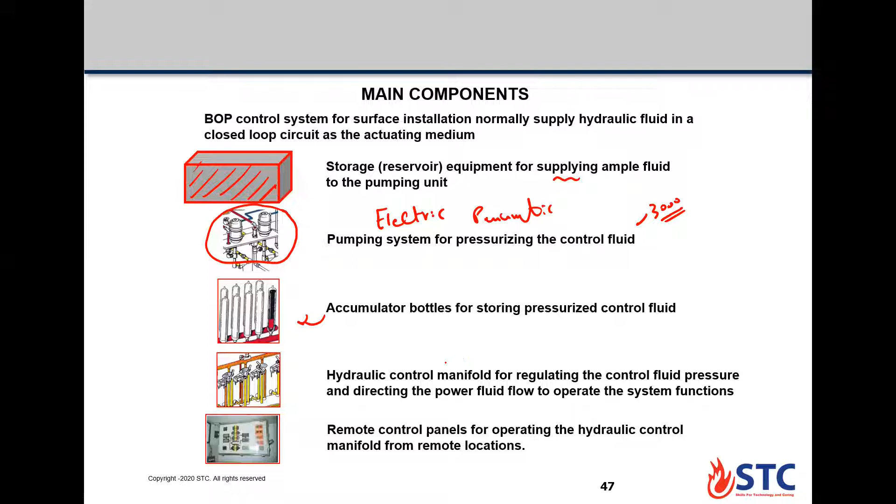Now you have a hydraulic control manifold regulator and the annular regulator to adjust the 3000 psi into the required pressure. If it is manifold, adjust it to 1500. If it is annular, adjust it from 600 to 1500 psi.

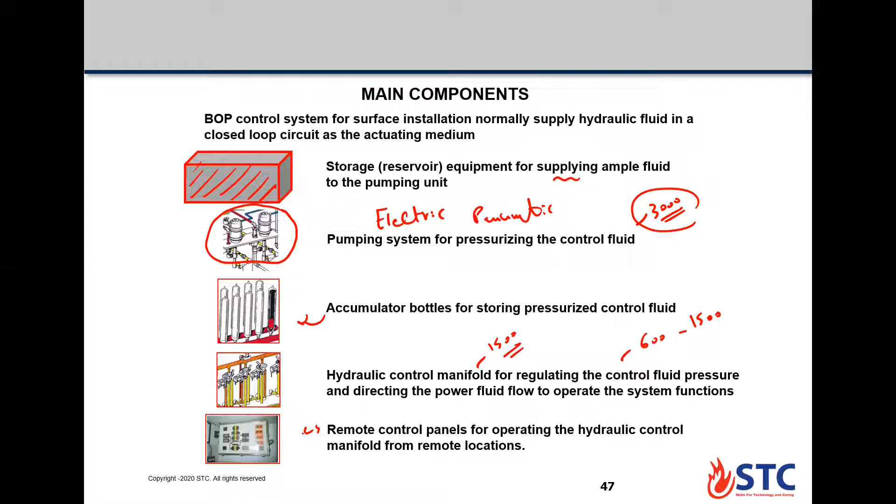Now we have here the remote control panel. The remote control panel is a panel that allows you to make the function from a remote location, not from the unit. Here is a simple schematic for the BOP control unit.

First thing, starting here, we have the air compressor. Now the air starts to come to this point until passing to the air lubricator. The air lubricator, as if the air is dry, can cause some erosion to the equipment. So this is the air lubricator.

Once the air comes to the pneumatic pump, it starts running it. Here for the electric pump, this one is electric and this one is pneumatic. So the electric pump has an electric power supply, an auto electric starter to run it. And here for the pneumatic, it runs with the air pressure.

Here is the reservoir tank. So both pumps start to take fluid from the reservoir tank through suction lines and start to raise its pressure to 3000, then store it here in the bottle.

The electric pump is designed to run if the pressure of the fluid gets below 90% of the full accumulator pressure. This means when the pressure reaches 2700 psi, the electric pump starts to run to raise the pressure to 3000 again.

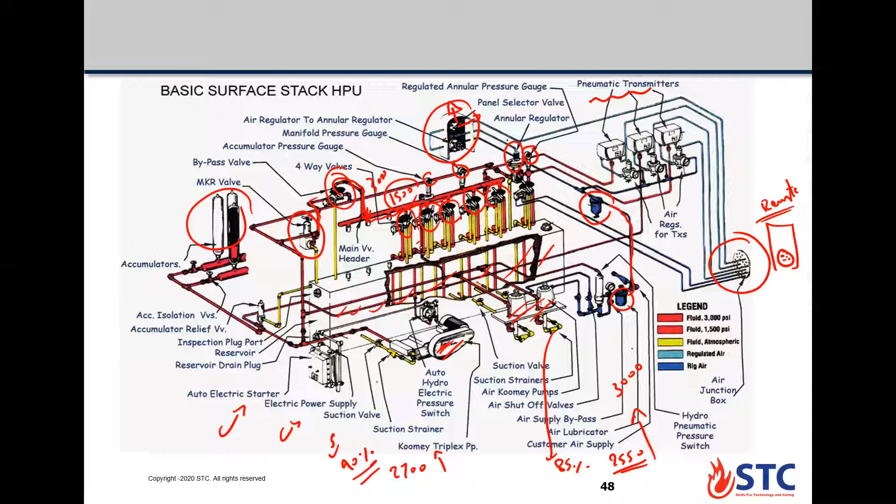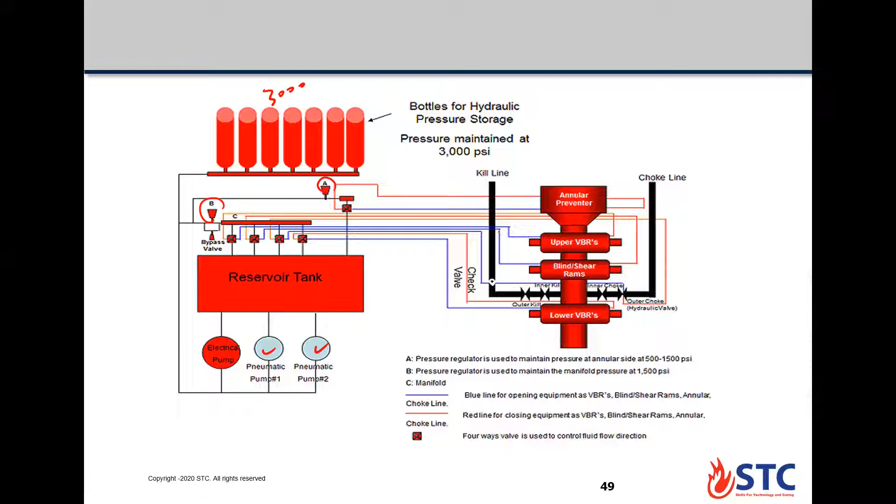Now let's go ahead. Here is the reservoir tank, pneumatic 1, pneumatic 2, electric pump. They take fluid from the reservoir tank, start to raise its pressure to 3000 psi. Now we have the annular regulator and manifold regulator taking the pressure to open and close lines to the annular and the set of rams. Here is the BOP control unit with the gauges: accumulator gauge, manifold gauge, and annular gauge.

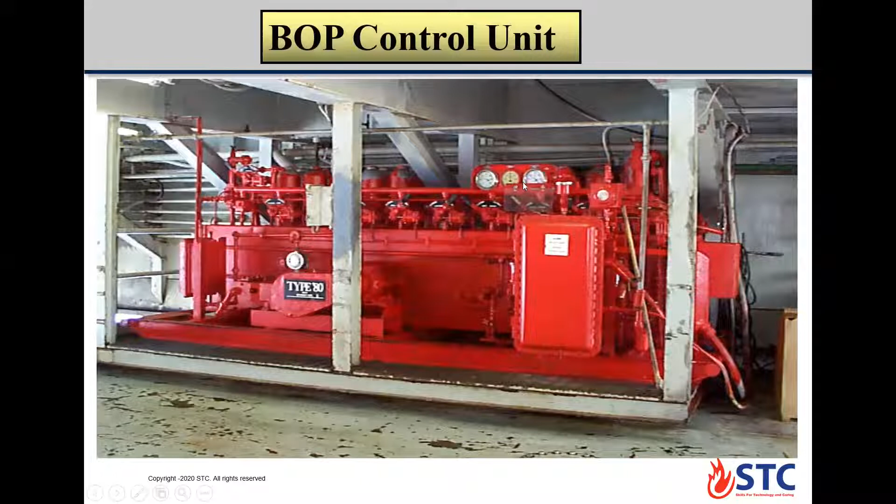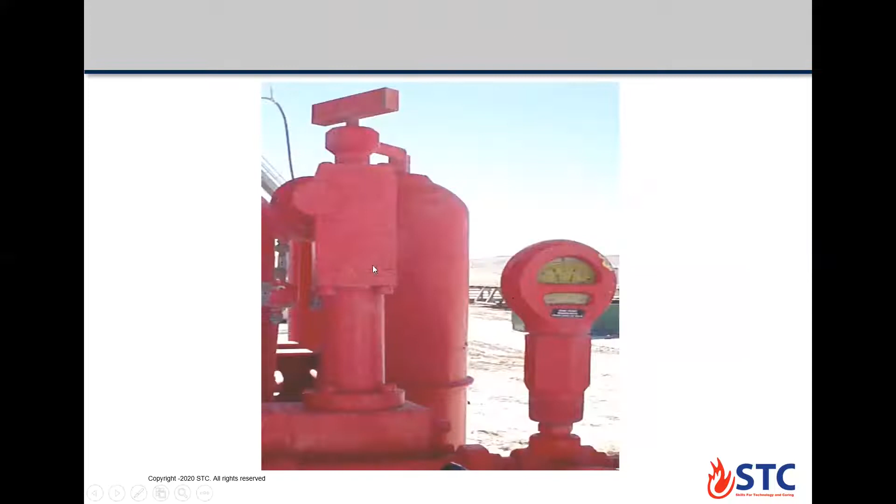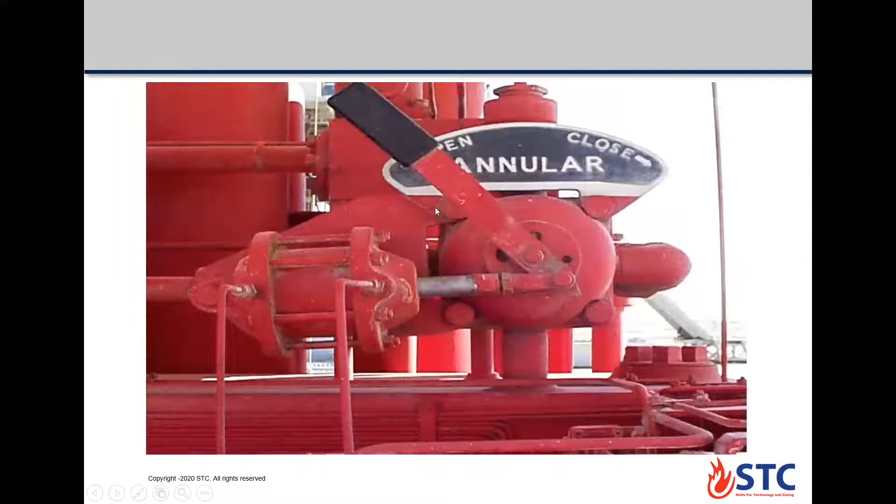Here are the bottles, and here are the hydraulic lines, close and open lines, for the BOP stack. Here is the manifold regulator to adjust the pressure. Here is the 3-position 4-way valve: open, close, and neutral position. Here is the 3-position 4-way valve for the annular: open, close, and neutral. And these two lines are for open and close.

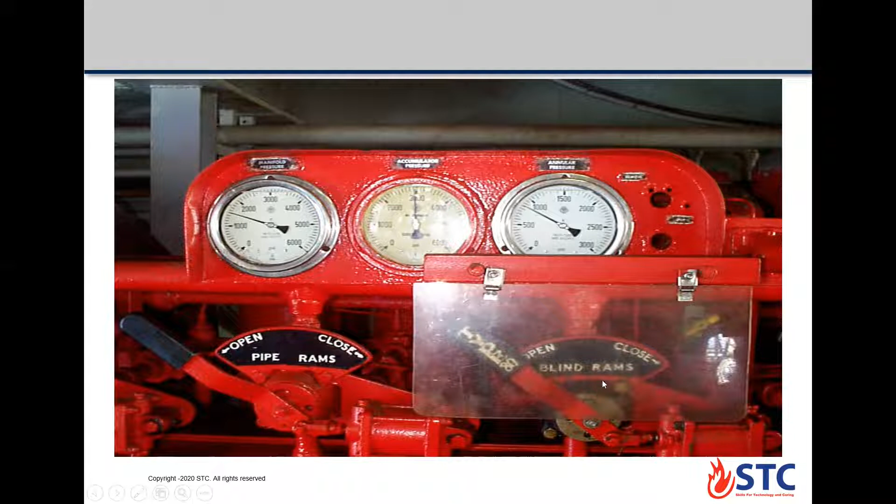Here are the gauges. This one is the accumulator. Here is the manifold, and this one is the annular. If you look here to the blind ram, you're going to find that covered, so not anyone can open or close it by mistake.

Here is the electric pump, the pneumatic pump, and here to reach the accumulator calculation. Once the bottles come to the surface, they will have a pre-charge pressure of 1000 psi. It will be pre-charged with nitrogen, because nitrogen is an inert gas. Then, once running the two pumps, you reach the full accumulator pressure of 3000 psi.

Once reaching 3000 psi, we have to conduct a test called the drawdown test. The drawdown test is to close the annular, close a minimum of 4 rams, then open the HCR. Once you do all of these functions, the remaining pressure should be 1200 psi or larger. This is called the minimum operating pressure.

Minimum operating pressure: if the pressure after making the drawdown test is below 1200, we need to wait 15 minutes. If it's back again to 1200, it's okay. If not, wait another 15 minutes. If still not, this is not an accepted test, and we need to check for the problem.

Here is the remote. Sorry, for the drawdown test? Yes, drawdown test, I know, yes.

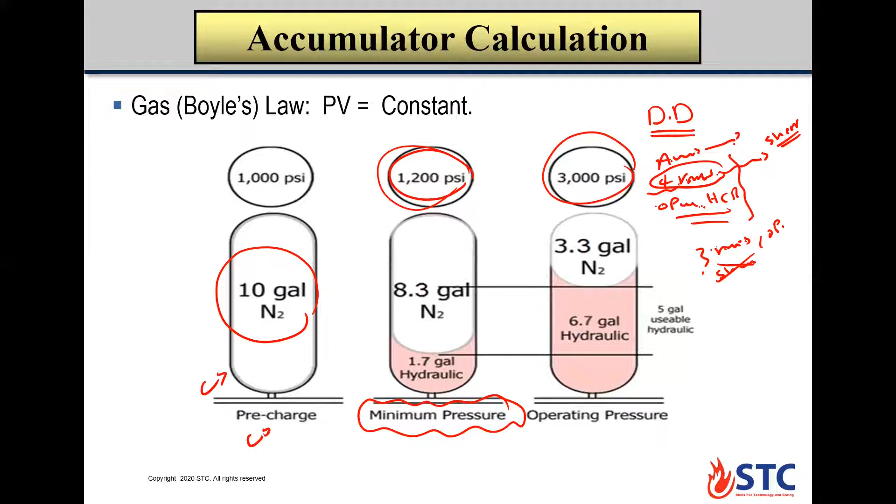So now you close annular, close minimum 4 rams, and open HCR. Then the remaining pressure should be 1200 psi. If not, you need to wait 15 by 15 minutes. Is the pressure back again? Then it's okay, accepted test. If not back again to this value, you need to check the pressure, and it is not an accepted test.

Now here for the remote control panel. The remote control panel is just a descriptive figure for the BOP. You have the master valve, push valve, and open and close for all rams and HCR. Also, you have a digital counter for accumulator pressure, manifold pressure, annular pressure, and rig air pressure.

To use this remote control panel, it's called a two-handed operation. You need first to push the master valve, then open or close the function you want. Once you push the master valve, you activate the air and the whole panel, so you can do the function once you push the master valve.

Let's mention, for example, if we need to close the annular, we have open and close. Let's say annular pressure is regulated at 1000, and here we have the accumulator pressure at 3000. So once we need to close the annular, push the master valve, then press close.

Once you press close, the light should change from green into red. Once the color is changed, this gives you indication that the 3-position 4-way valve is working properly.

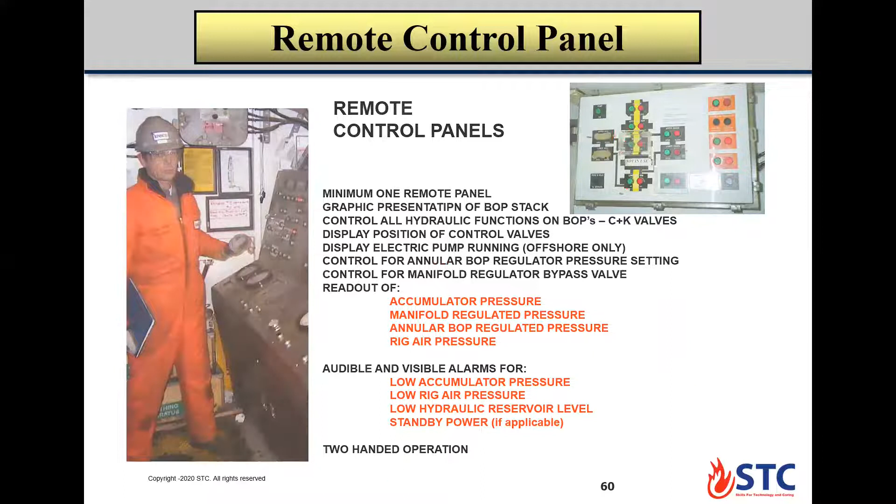Here is the remote panel to the BOP. Rig air, once pressing master valve, activates air pressure in the remote panel, so you can send signals to the BOP.

When the BOP ram is in closed position, the closed line has 1500 psi. If it is in open position, the open line has 1500 psi.

When the 4-way valve shifts, the micro switch activates the light to illuminate. Once the light illuminates, this gives you indication that the 3-position 4-way valve is working properly.

But if you find the color didn't change and the pressure dropped then built back up again, this is a problem with the light bulb itself. When the light illuminates, it tells us the oil, or hydraulic fluid, is on its way to the BOP function, but that's not confirmation. The confirmation is when you look at the pressure and find it drops, then builds up again.

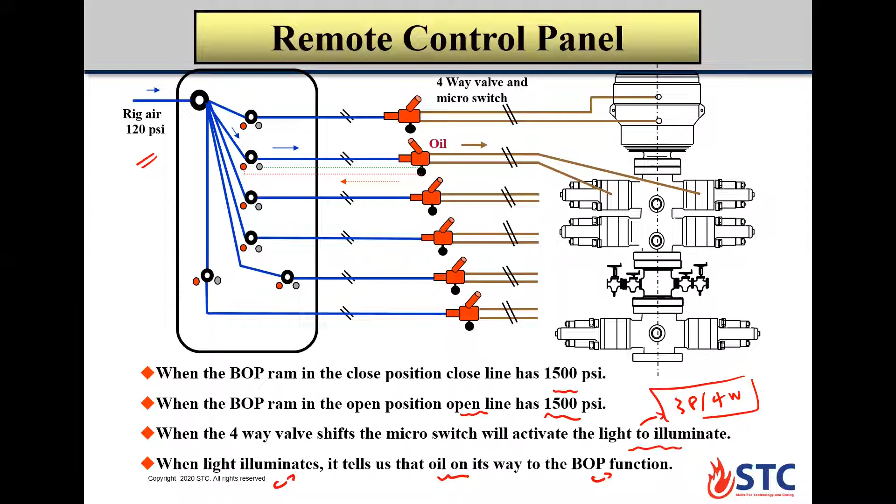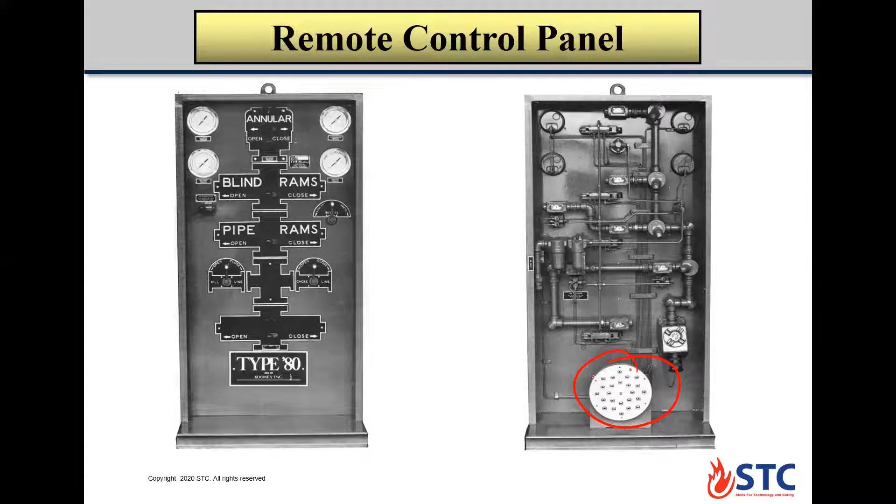Here is the junction box connected to the junction box of the unit, through an airline transmitter transducer, so you can make the function from a remote area.

Here is the 3-position 4-way valve: open, close, and block position. Once you are in open position, all pressure in the system will go to the opening chamber, and the volume in the close side will go back again to the drain.

But if you move it to the closed line, all pressure in the system will go here in the green line so you can close, and the volume in the red one will go back again to the drain. So three positions: open, block, and close. Four way we have: drain, pressure, open, and close.

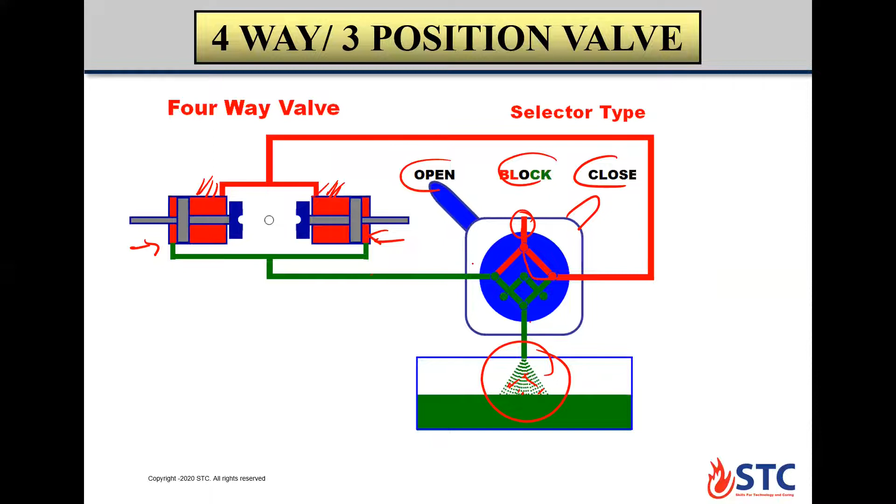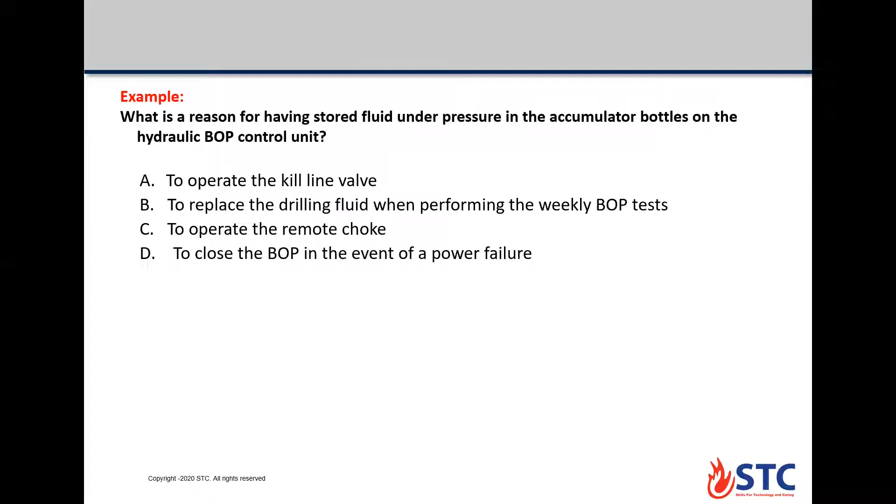Could you check this one, please guys? Option D. Yes, D. Okay, good.

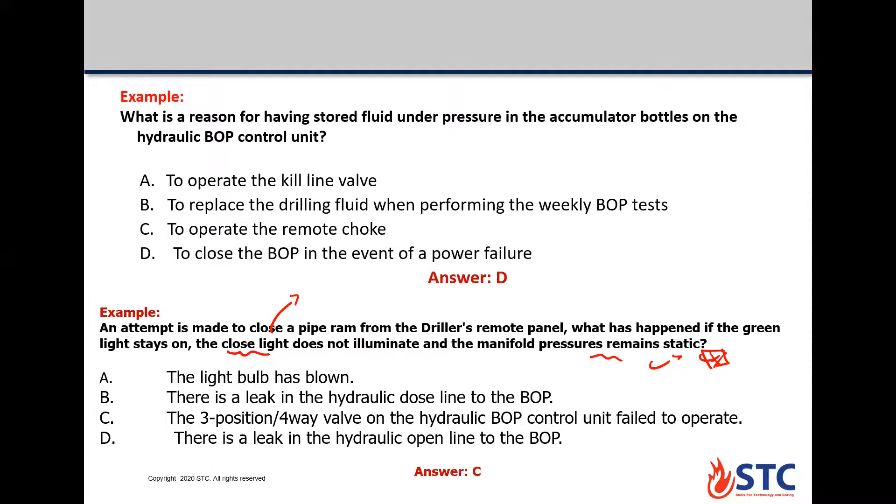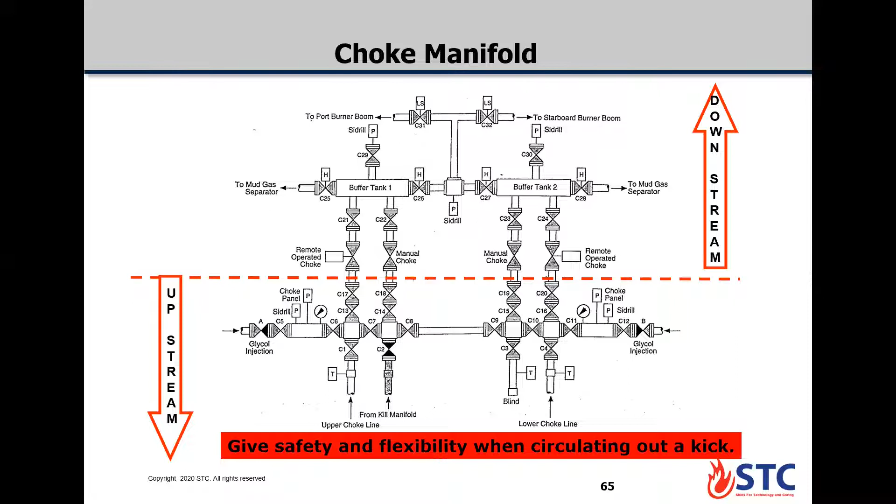Now let's talk about the choke manifold, upstream and downstream, an arrangement of valves to control the fluid passage. Here is the choke. The choke's function is to create back pressure during circulating out a kick.

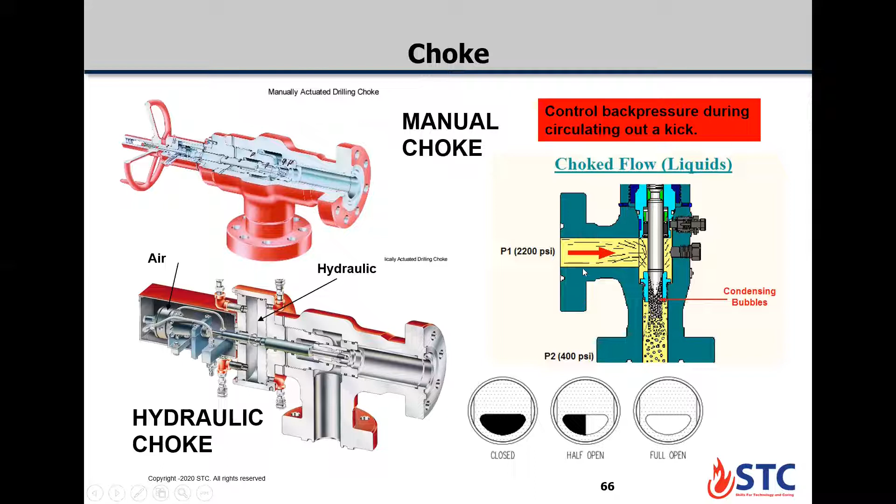When the influx comes from here, you need to open and close the choke, adding more choking if you want to increase the bottom hole pressure, or opening the choke to decrease the casing and bottom hole pressure, so you can control the circulation of the influx.

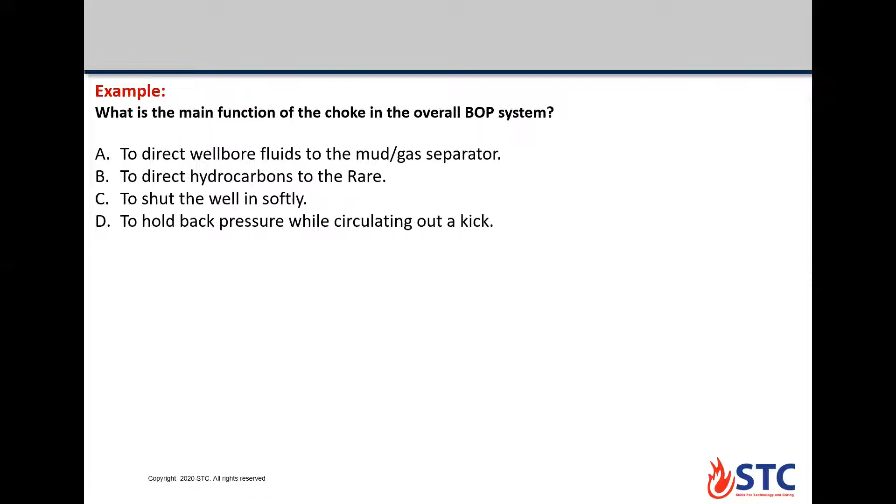Here, could you please check this one, guys? What's the main function of the choke? Option D. Hold the back pressure, yes, while circulating.

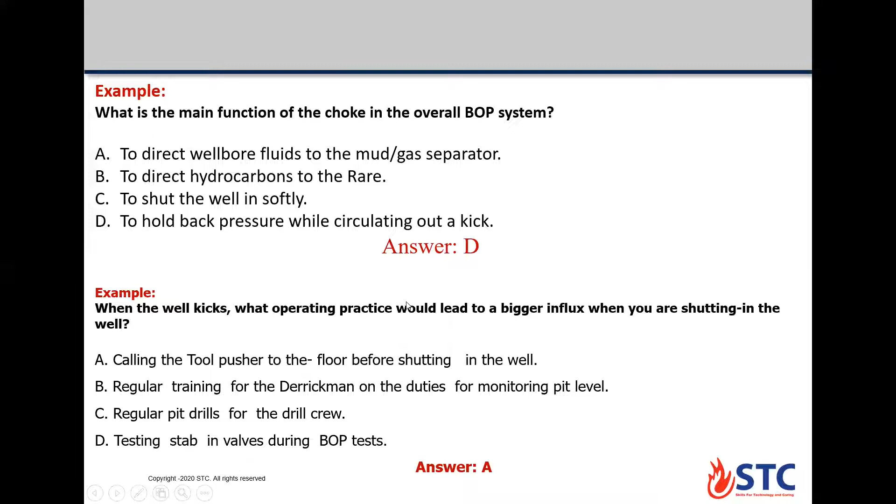Okay, what about this one? Option A. Yes, this is the problem that leads to a bigger influx when you call the tool pusher before shutting the well.

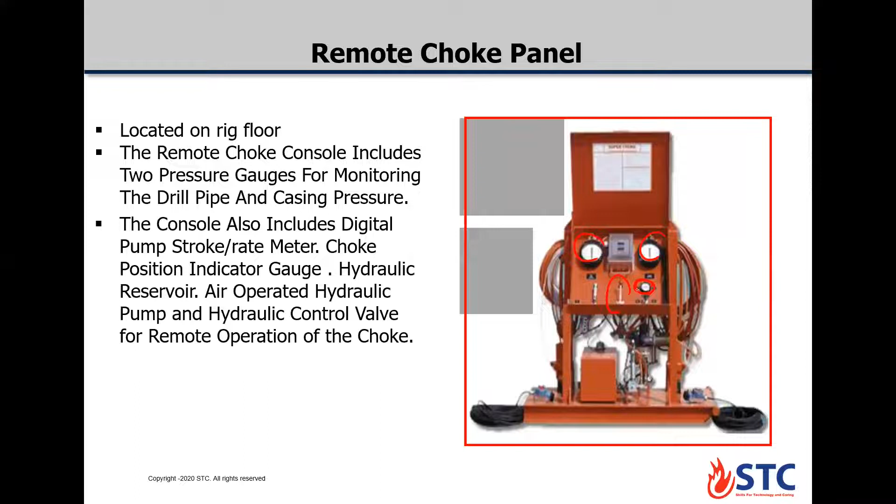Here is the remote choke, guys. The remote choke has two gauges: drill pipe pressure gauge, casing pressure gauge, and a choke arm to open and close. Here is the speed regulator, and this is the choke position gauge. So you can use this during killing the well through the remote choke panel.

This U-tube provides the operating pressure required for the mud gas separator. Let's have a clearer view. So here this U-tube has good mud, which provides hydrostatic pressure, and depending on this hydrostatic pressure, we can determine our operating pressure.

So here the gas provides a pressure. This pressure of the gas should not equal or exceed the hydrostatic pressure in any way, so as not to allow the gas to overload the mud gas separator and enter the U-tube, then the shaker area.

For example, if we have hydrostatic pressure here of 10 psi, this is our maximum, so the operating pressure shouldn't reach 10 psi or larger. Once you find the operating pressure starting to increase, you need to take action, for example slow the rate—if you use 40 SPM, use 30 instead.

If the problem still exists, you can shut in the well and start pumping from here, from the hot mud inlet. Start to pump new mud inside the U-tube to keep your pressure higher, to prevent the gas from entering the shaker area, since any simple agitation can cause fire or explosion.

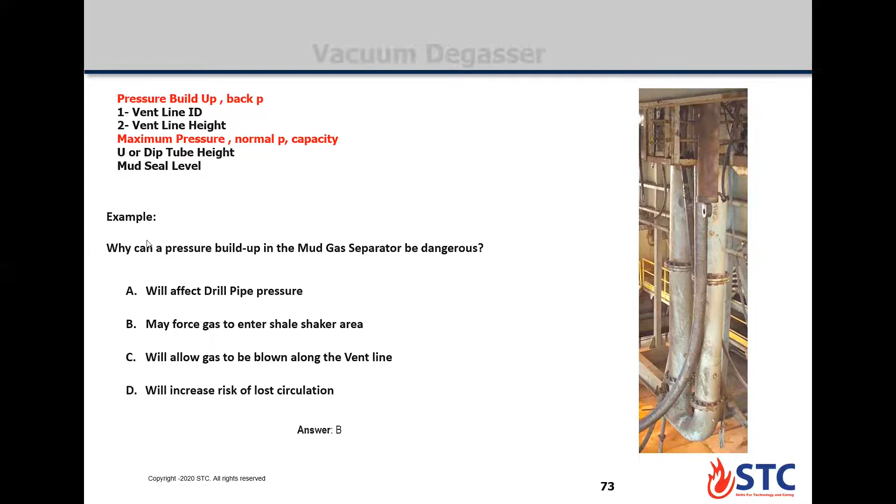Now to talk about the vacuum degasser. The vacuum degasser is used downstream of the mud gas separator. It is used to remove gas after the mud has been circulated across the shaker, so it can be used in drilling operations downstream of the shaker. It can also be used when circulating out a kick.

So it has two options: to use while drilling, or to use while circulating a kick. The mud gas separator can only be used while circulating out a kick. So the mud gas separator can't be used instead of a vacuum degasser, or vice versa - each has its specific job, and both the mud gas separator and the vacuum degasser have a volume limitation.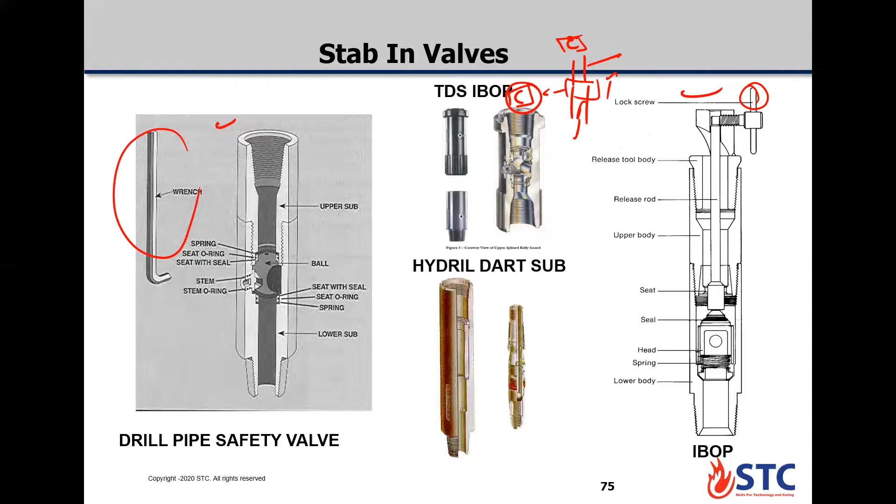So in case you wanted to get the shut-in drill pipe pressure, you need to pump, like with a float valve, to open the IBOP so you can record the pressure. You are not able to run wire lines through the IBOP inside the blowout preventer.

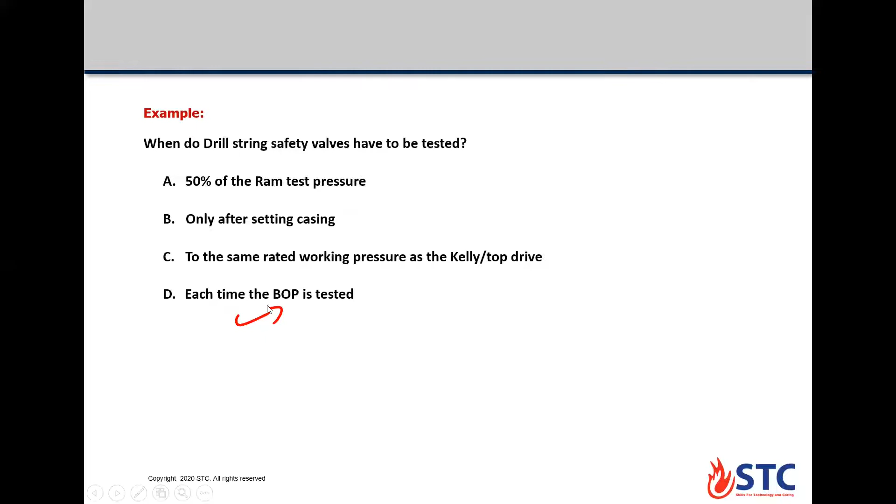So, the two drill string safety valves have to be tested each time the BOP is tested - we need to test the drilling safety valves, the IBOP, and the full opening safety valves.

So could you check this one, guys, while tripping? Soft shut-in. Option D, this one.

You need D? No, sorry. Okay, let me make it easy for you.

While tripping, the first thing to stab is the full opening safety valve, stab the full opening safety valve. So you need to choose between B and C. Stab the full opening safety valve, then close the safety valve, so it will be okay. Let's see - then yeah, so for soft shut-in, you need to open the HCR first, then close the BOP.

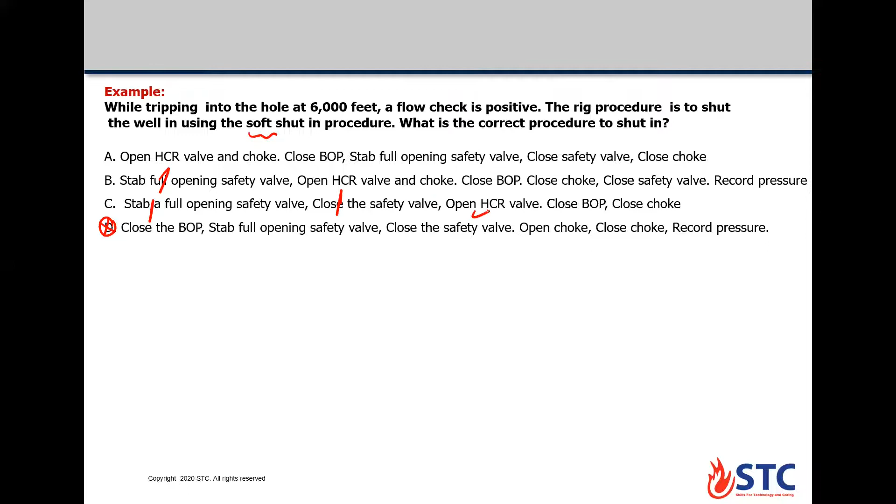Second one, while tripping, same thing - while tripping, use hard shut-in. While tripping, stab the full opening safety valve, stab the full opening safety valve. After stabbing, you need to close it. So this one: close the safety valve, hard shut-in, close the BOP, open the HCR, and record the pressure.

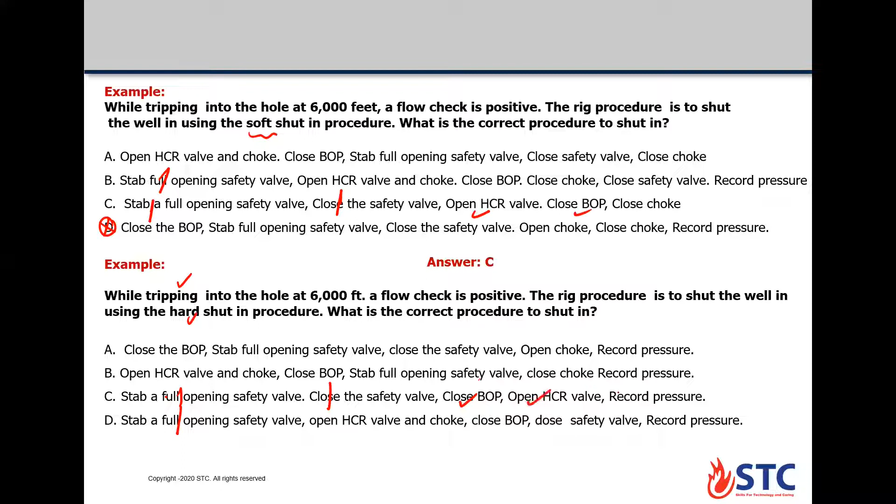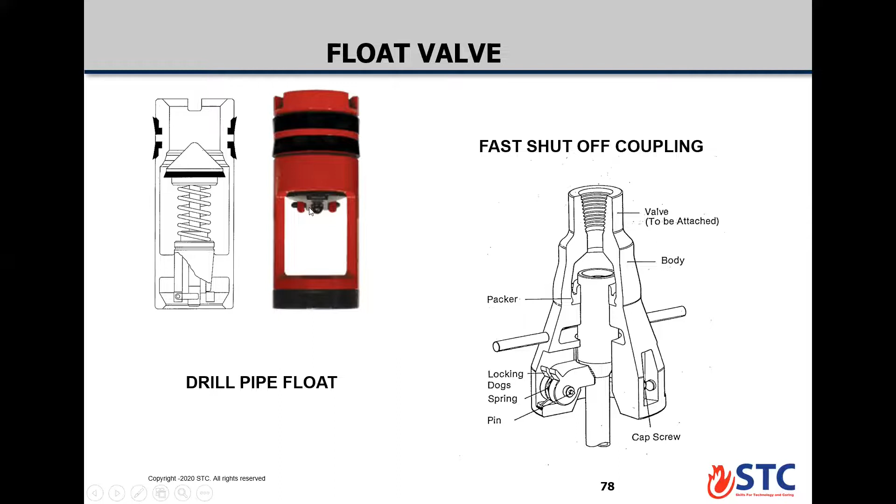Now here's the float valve. The float valve is used in the drill string to prevent any backflow during circulation. If it is installed in the drill pipe, you will not be able to record shut-in drill pipe pressure. So you need to start the pump slowly, for example 5 SPM, till communication happens and the casing pressure starts to increase. Once casing pressure starts to increase, you can record shut-in drill pipe pressure minus any extra pressure on the casing pressure gauge.

Okay, could you check this one? What statement is true if a non-return valve is stabbed into the string? The non-return valve here is the IBOP.

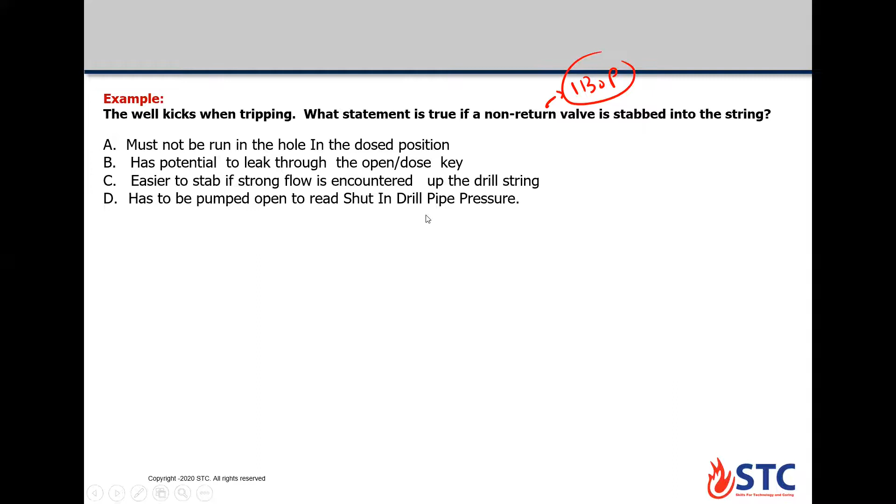Could you check answer D? Yes, D has to be pumped to open and read shut-in drill pipe pressure.

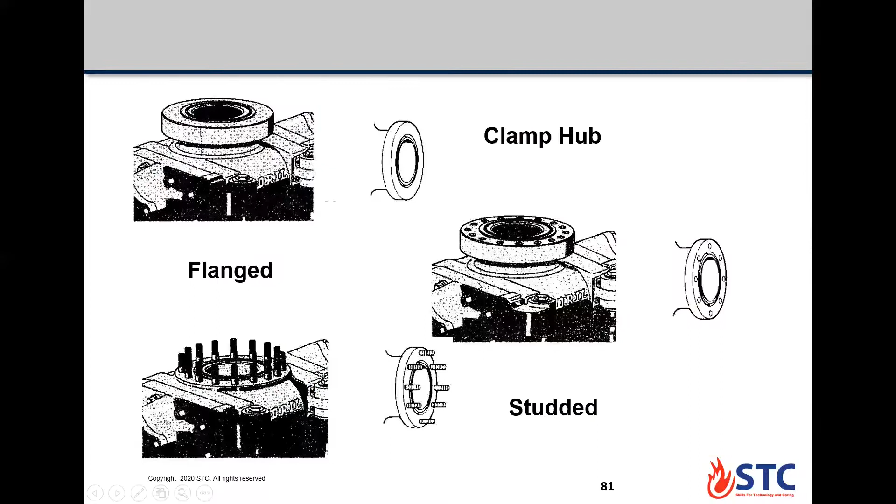Now to talk about the last thing, the API wellhead connection. We have the flange type, which is the most common one for connection, clamp hub, and studded. For API flanges we have two types: type 6B and type 6BX.

For 6B, we have two ring gaskets to be used, R and RX. For 6BX, we have only BX ring gasket to be used. 6BX is used for high pressure rating wells and for gas wells, from 5 to 20,000 PSI. For 6B, only for low pressure rating, from 2,000 to 5,000.

Let's look at this slide for the 6B flange. You will always see a standoff between the two flanges, so we need to retighten after the test. But for 6BX, there is no standoff, so it's used for high pressure wells.

Ring gaskets are to be used one time only, not more than once, even if by visual inspection it looks in good condition. You need to change it because once you apply pressure, it takes the shape of the place it's installed. So you need to use it once.

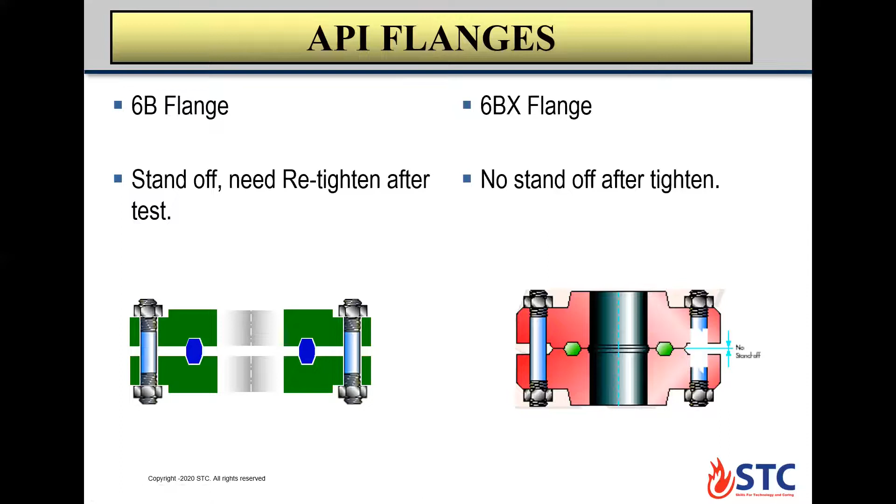Before using the ring gaskets, you need to clean its place, then dry it. There is a hole in the ring gaskets, only for self-energized gaskets, RX and BX, so the ring gasket can take the shape of the flange groove, so no leaking can happen across the ring gaskets.

Could you check this one, guys? Which of the following statements about gaskets is correct?

Option A: BX and RX are called pressure energized seal. What about this one? Sorry, BX and RX, or only BX? BX and RX are called pressure energized seal. Because in the previous slide it was only BX.

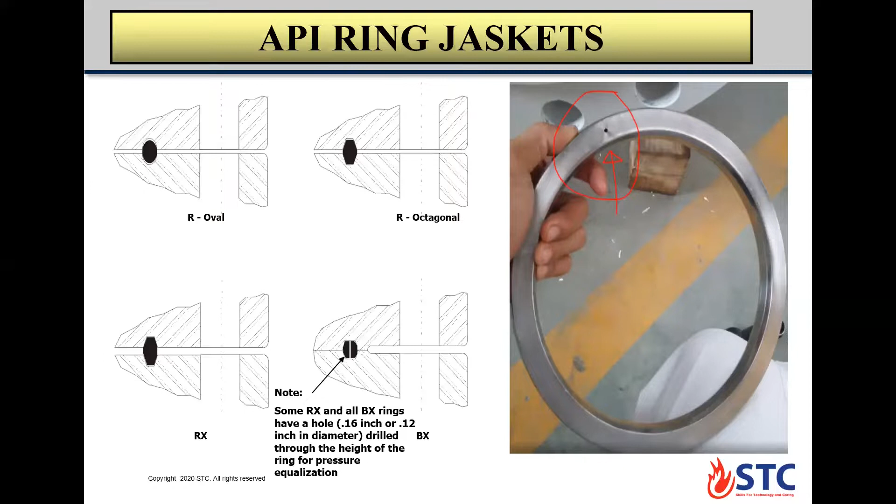RX and BX, some RX and BX. You see in the BX there is one hole, but in the RX there is no hole. We have R, RX, and BX. So RX and BX is self-energized, but R is not.

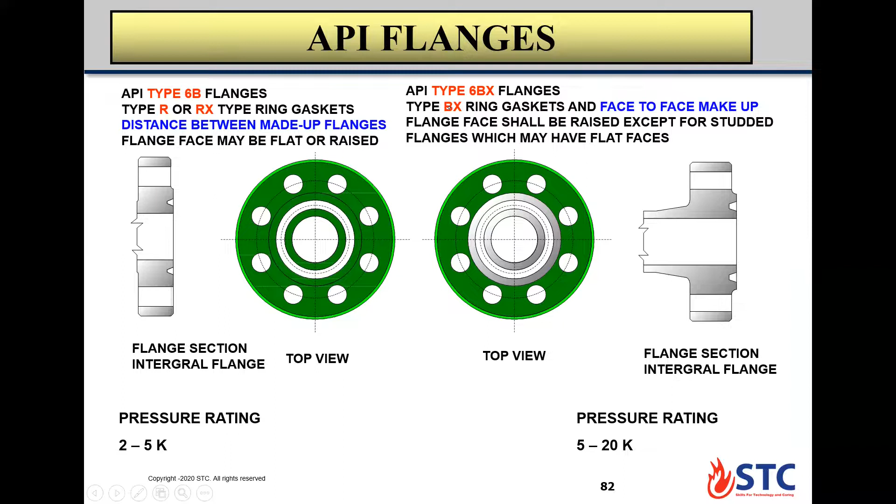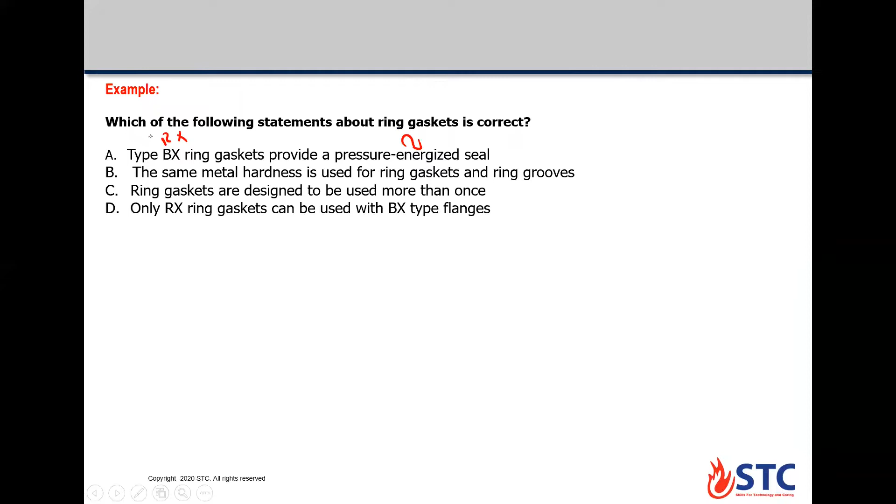So we have three types of gaskets: R, RX, BX. The ones ending with X are self-energized. All BX are self-energized, but only some of RX are self-energized. So for the question, the answer will be type BX, but some RX can also be used as self-energized or pressure energized. So what about this one?

Option B. Yes, 5,000. So the maximum will be rated according to the 5,000.

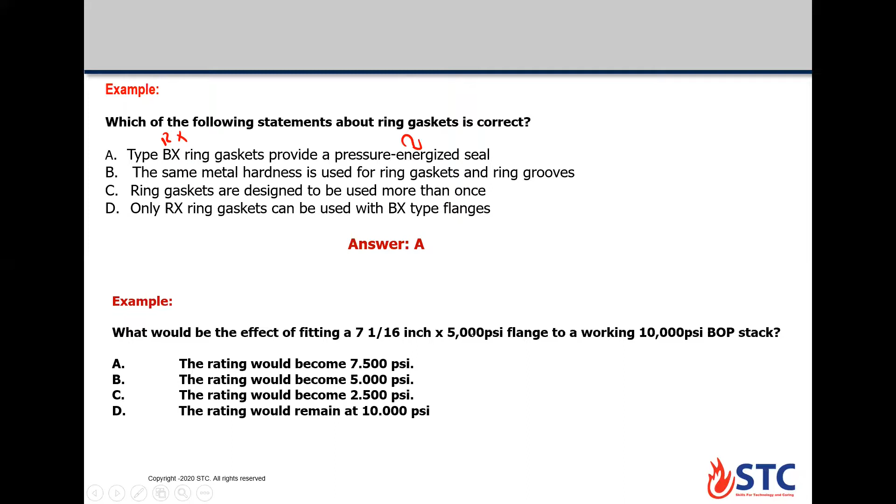Okay guys, so now I think we finished the equipment part. Any questions related to this point?

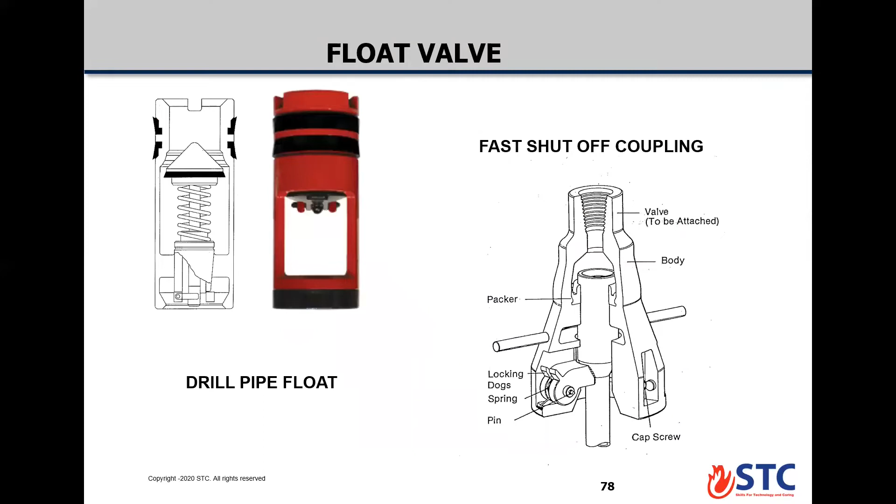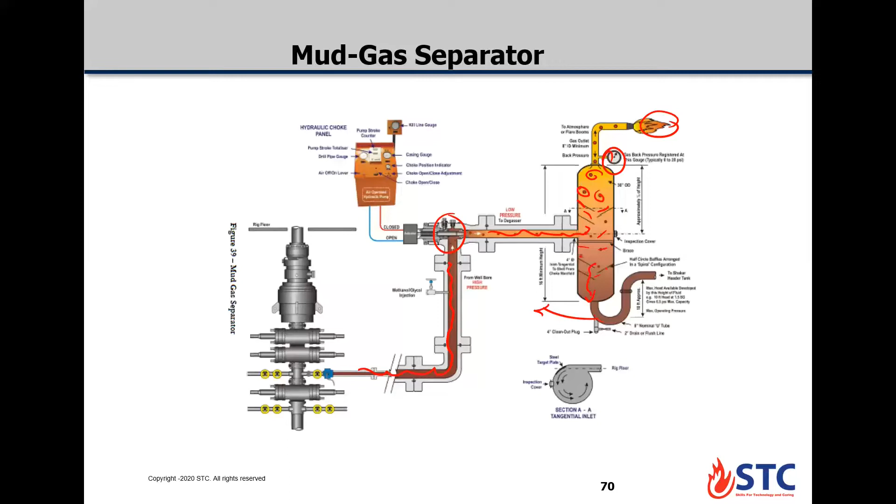Yeah, if we can come back to the mud gas separator slide. Yes. No, the other one, go to the other slide. No, the other, forward. This one or the previous one? The other one. Forward.

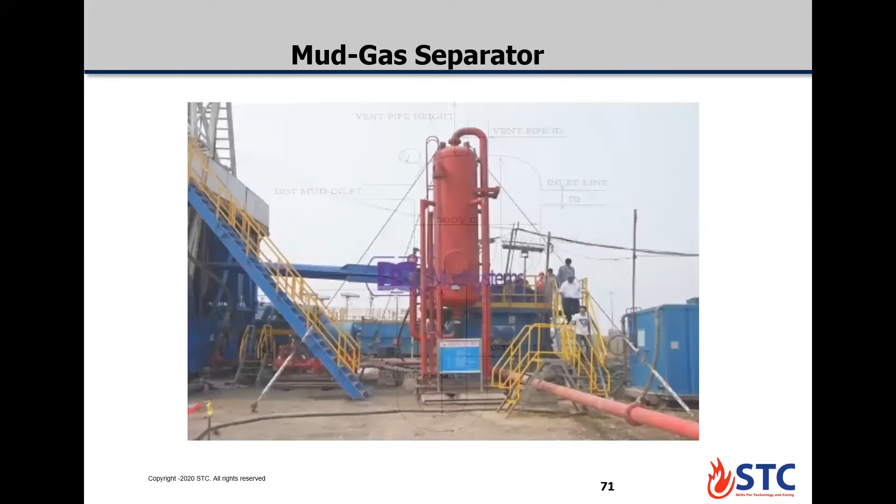Yeah, here the pressure build up. Pressure builds up on the mud gas separator depending on the vent line ID and vent line height. If the vent line is small, you can apply back pressure. It should be vent line length, not height, because the length will create friction.

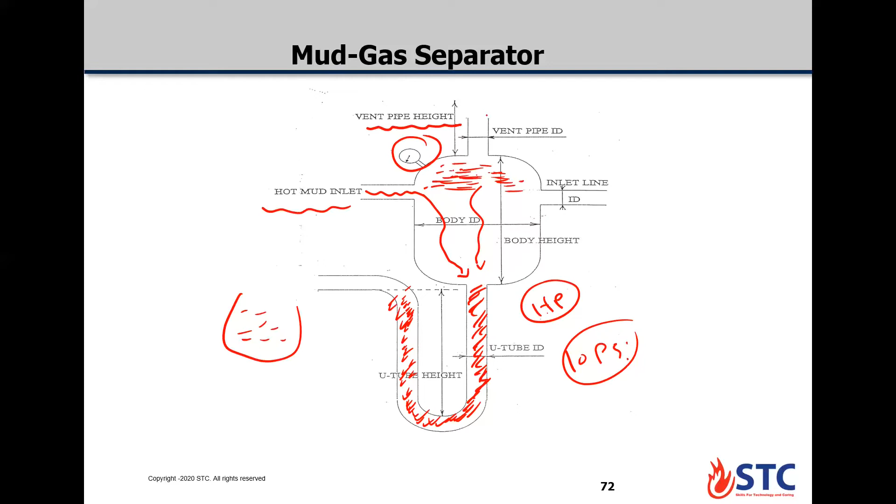Length or height? He means this part, this area here, vent line height. Again, sorry. No, because the height makes maybe the gas gradient or something. No, here's what he means, I got your point. So the length may be usually higher than, or larger than, the height. So if it's increased, it can cause more friction. Right, yes you're right, but vent line height actually makes sense.

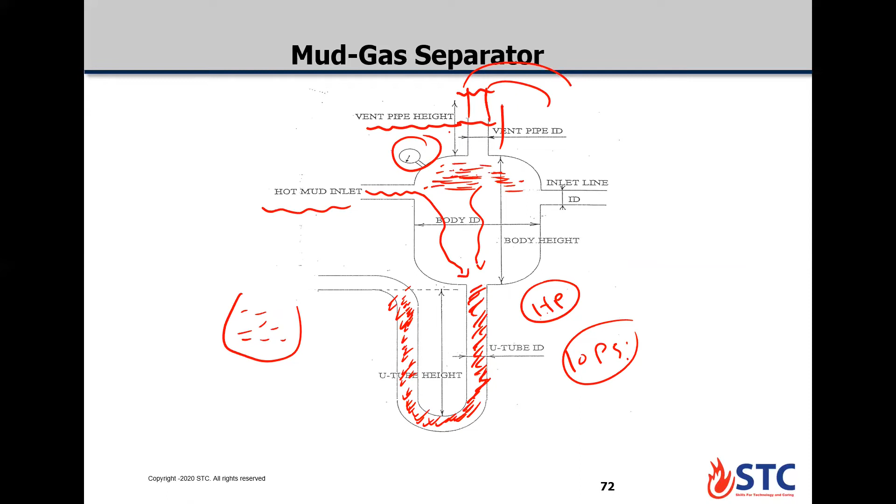So vent line height, if it's large - for example, if we have two mud gas separators, one vent line ending here, another one ending here - it depends on the height. Also it depends on the length. So if you mention both parts, you select length. If height only, it's accepted only, no problem.

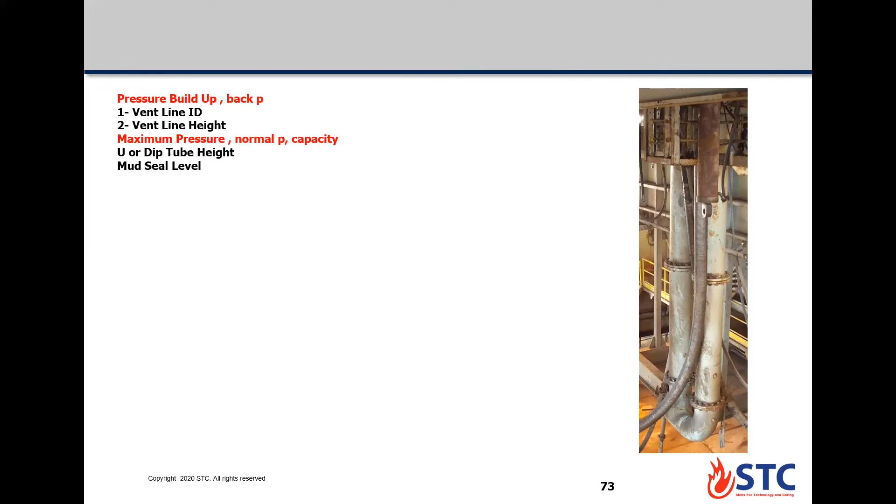Okay guys, so let's start to open our exercise book. We have simple questions to solve. Okay, let me finish this one.